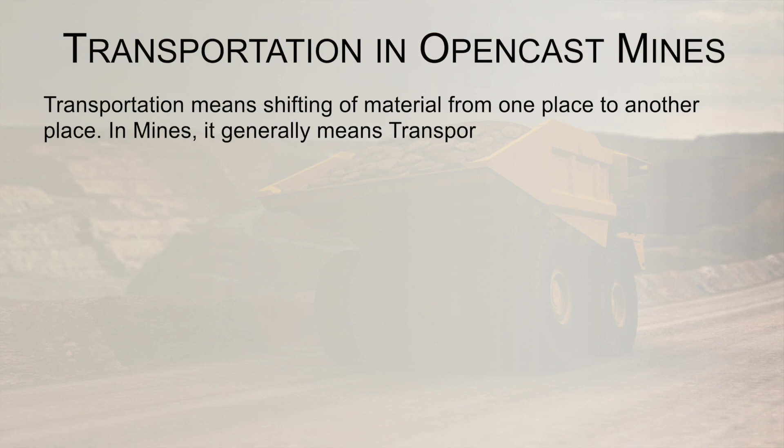Now I am taking up the matter of transportation in open cast mines. Transportation means shifting of material from one place to another. This is necessary because the mine is away from the crusher and the processing plant. The first destination from the mine is the run of mine crusher of the beneficiation plant, which needs various transportation means.

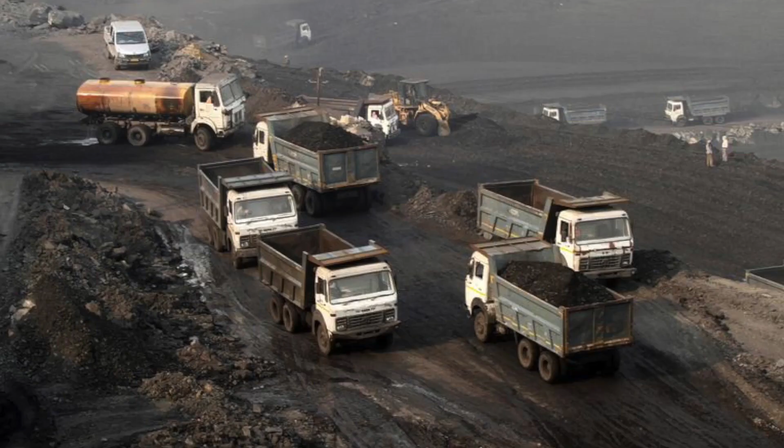In earlier days, track mounted haulages were quite common. Tubs were small, maybe 1 ton capacity, and the locomotives were also small, with weights around 8 tons to 35 tons, and the track gauge was hardly 600 mm, or 2 feet, in the past. So the mobility was not that high since it used to move on the track only.

Still, in some smaller mines where owners can't afford highly capital intensive transport means like big dumpers, 100 tonners, 20 tonners or 120 tonner dumpers with big shovels, people work with manual forces, and tubs are still loaded manually at the mining faces, then removed by direct haulages. If it is inclined, then endless rope haulages are used. If it is gently sloping, endless rope haulages are also used on plain grounds. The direct haulage system is quite common particularly where inclines are there.

Apart from dumpers and shovel or loader excavators, there are other combinations, that is conveyor combinations. Conveyors are quite common with bucket wheel excavators. The bucket wheel excavator is a continuous process for excavating material from a mining face, and onward it transfers the material to the next conveyor systems, and ultimately it goes to the processing plant, where crushing and the onward process goes on for refining the ore, material, or coal.

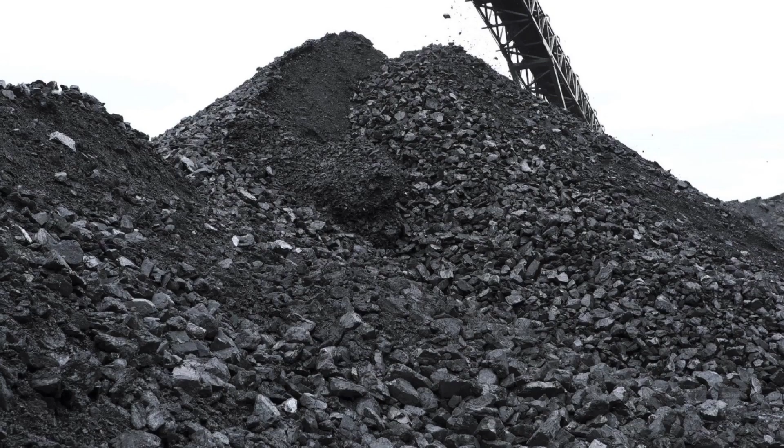The last one is aerial ropeway. Aerial ropeways are used particularly in loading plants, where the material comes from the mines to the bins and storage bins at the siding, where the bins are opened from the bottom and the material is finally loaded into railway wagons. So that way aerial ropeways are quite common. Still in the Dhanbad area you will see aerial ropeways bringing material from the river to the mines for stowing purposes in coal mining.

So there are two types of ropeways. One is the monocable ropeway. The cable is mounted on roller wheels, sprocket wheels, on the sides of the trestles at height, and the cable rolls over with the projection of the arm rod of the buckets which are hanging from the rope.

Here the ropeway cable, the steel wire rope, is holding the bucket frame, and at the same time it is also pulling the bucket frame. So a single cable is doing both jobs, and it rolls over the side roller wheels on top. That is called monocable.

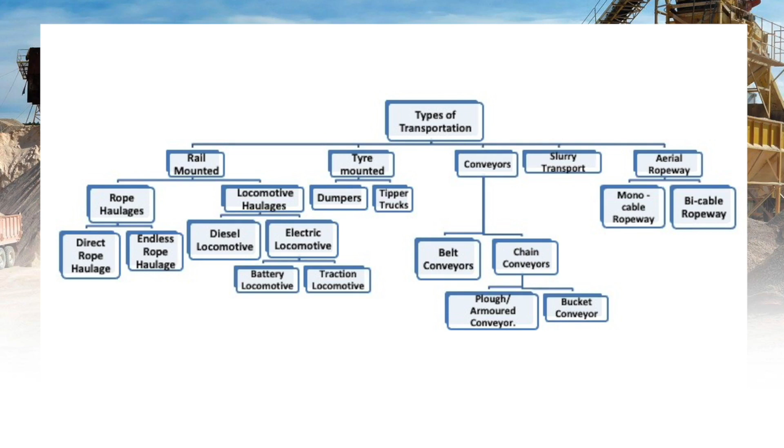Another type is carrier rope. The roller of the bucket frame on top rolls over the carrier rope, and there is another rope just below it, fixed to the frame of the bucket, which is the pulling rope. So the puller rope pulls while the carrier rope supports the bucket frame from the top, and the rollers attached to the top of the bucket frame roll over the carrier rope. This setup forms the bi-cable ropeway.

I have already talked about direct haulage. In case of movement of material by rope haulage, what is the prime mover? The prime mover is either an electric motor or a diesel engine. Then the power transmission - the end is the driven target, meaning the tub is the end which is pulled by the rope. How is the tub attached to the rope?

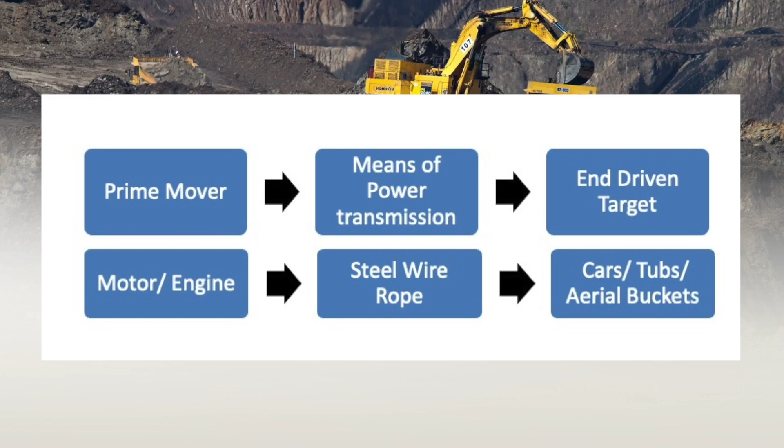Either by direct tying with the set of tubs, in case of direct rope haulage. In case of endless rope haulage, there are different clips on the rope because there is no end of the rope, so those clips attach the tubs to the moving rope. That way the rope is the via media for transfer of power from the prime mover to the tubs. So here is the general power transmission layout of the rope haulage.

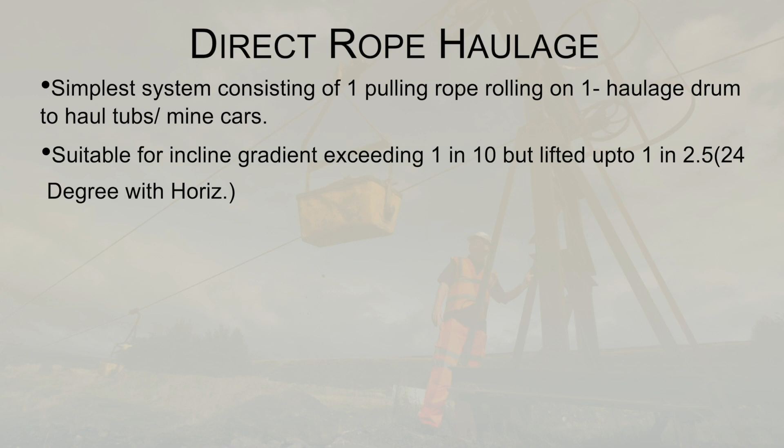Direct rope haulage is very simple. It works even on a gradient of 1 in 2.5, that is 24 degrees, down to 1 in 10, but it is most suitable for inclined gradients exceeding 1 in 10 - that means it is very suitable for steep gradients. For this, the haulage engine is a slip ring induction motor.

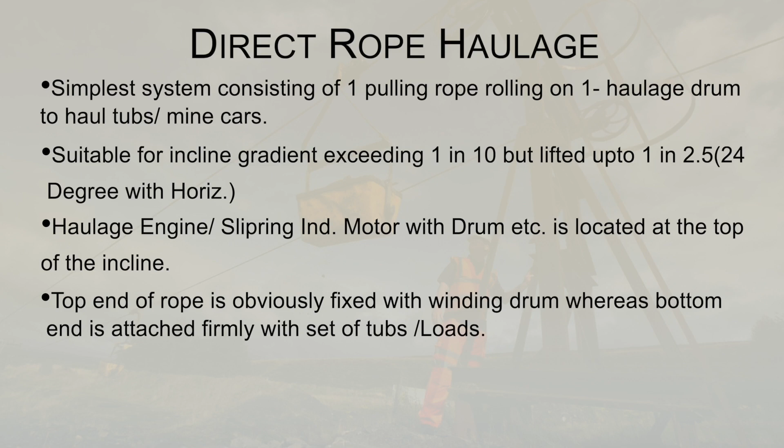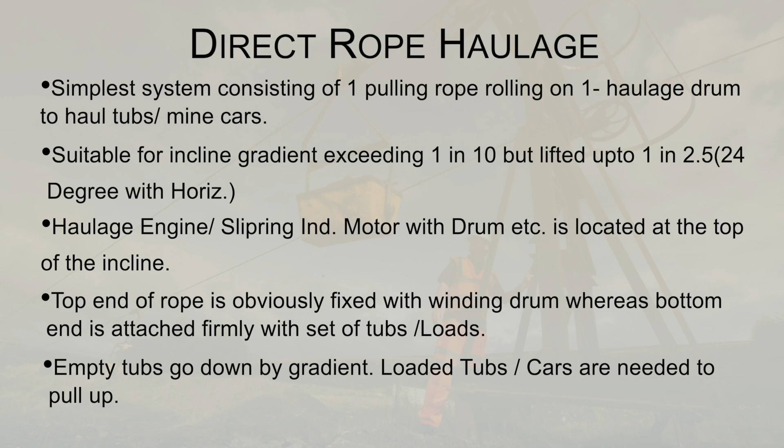The top end of the rope is fixed with the winding drum. That means the rope is attached at one end to the set of wagons at the lower position on the incline, and the upper end of the rope is tied to the drum of the direct rope haulage engine, the motor or engine installed at the top. Empty tubs go down, and the loaded tubs come up.

Rope speed is 8 to 10 kilometers per hour. For safety, on the last tub of the set there is what's called a monkey catch, or safety latch, or back stay - a back stay is given on the last end of the tub.

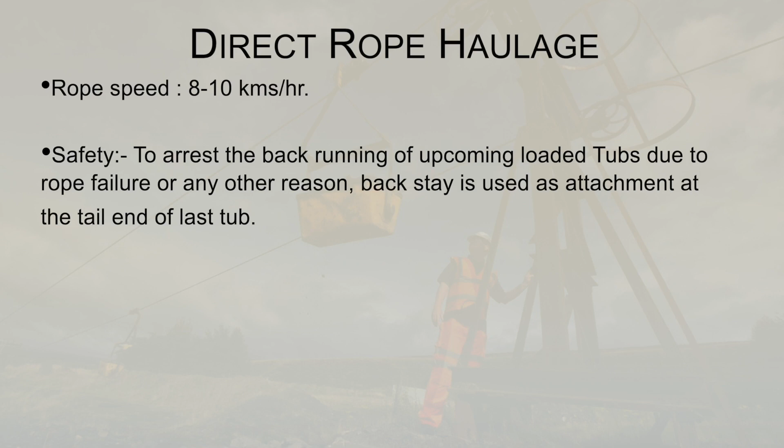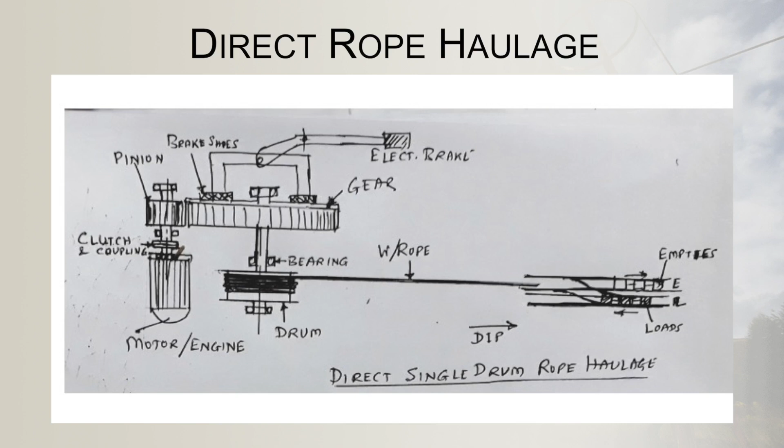On the left side the empties are going down, and on the right side, through the switches of the tracks - switches meaning a changeover like railway switches - the loaded tubs are coming up.

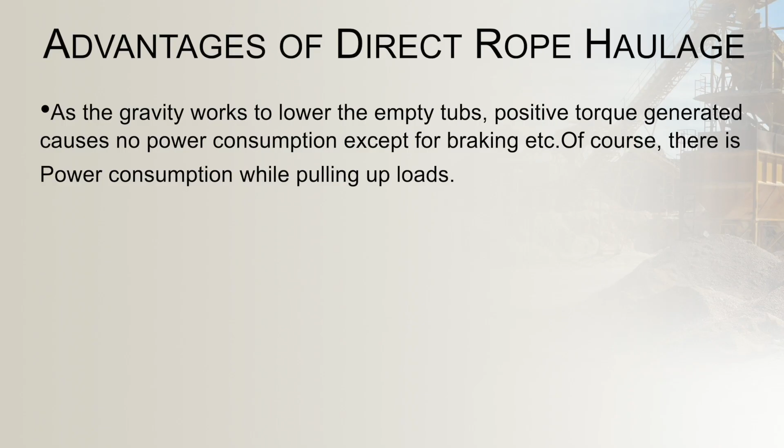As gravity works to lower the empty tubs, positive torque is generated - I have already told about this part - so pulling up the loaded set of tubs is not that power consuming. Definitely it needs overcoming torque, because the empty tubs going down generate positive torque, but that does not mean no power is needed at all - there will definitely be pulling power required to overcome the weight of the loaded set of tubs moving upward.

Now next comes the endless rope haulage. As the name implies, this rope haulage has an endless rope, meaning both ends of the rope are spliced and tied with each other. Splicing means it is jointed - opening the strands and weaving them again against each other to hold the rope properly, and then clamped. Clamped means couplings are used - a rope coupler, very smooth, filled inside with white metal, which holds the rope nicely and makes it endless.

So in endless rope haulage, both the load and the empty move together, one on each side simultaneously, because it is always moving in one direction.

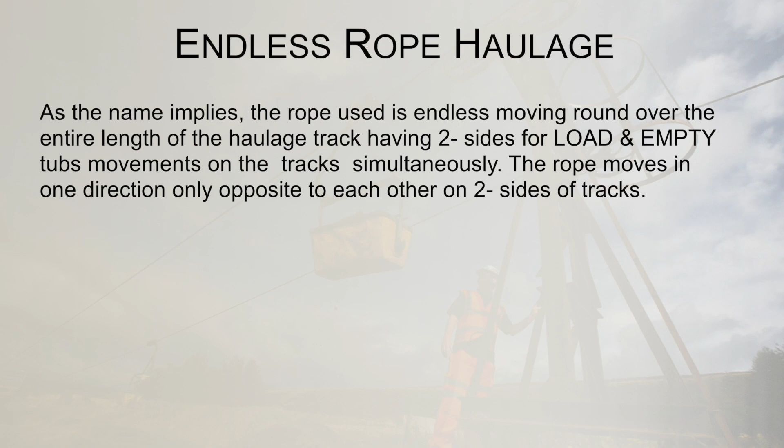The rope always moves in one direction; it does not reverse. So empty tubs from one side go to the mining face, while from the other side, loaded tubs come to the plant where processing takes place.

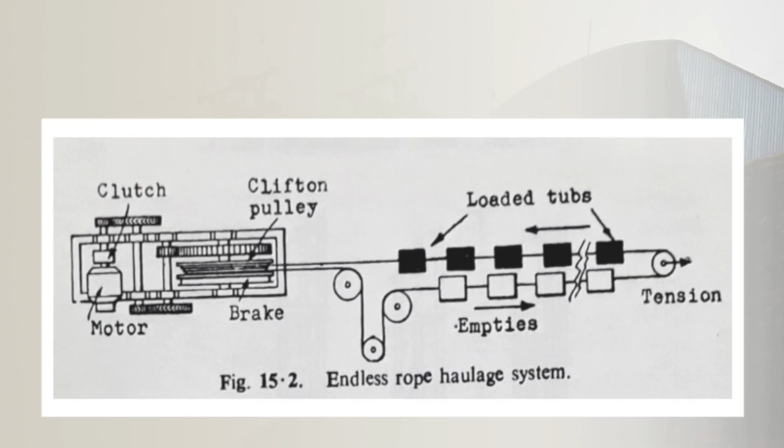Run of mine means the ore which comes out of the mine after blasting, transported to the processing plant or to the stockyard. This is the plan view of the rope haulage, a schematic view.

How does it work? The black set of tubs are the loaded tubs moving to the upper destination, shown on the upper side of the diagram. The empty tubs, shown in white, move together, and before the bend pulleys, the tubs are detached after reaching the mining place.

The bend pulleys are there. Their job is to negotiate the rope smoothly over the bend. Suppose any turning comes on the passage, meaning the mine roads or track have bends, then these type of diversion pulleys are used.

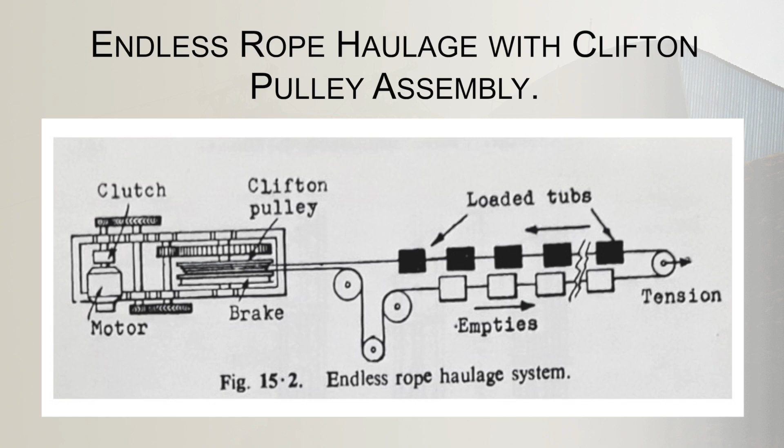On the right hand side, you can see the tension pulley. Tension is a must on the rope, otherwise it will not hold the drive drum properly and will be loose. So how can the drive drum pull or release the rope? It needs a very tight holding on the drum periphery so that due to friction, when the drum moves, the rope is either pulled on the left or right hand side, or released on the right hand side. I will show the diagram for giving tension after some next slides.

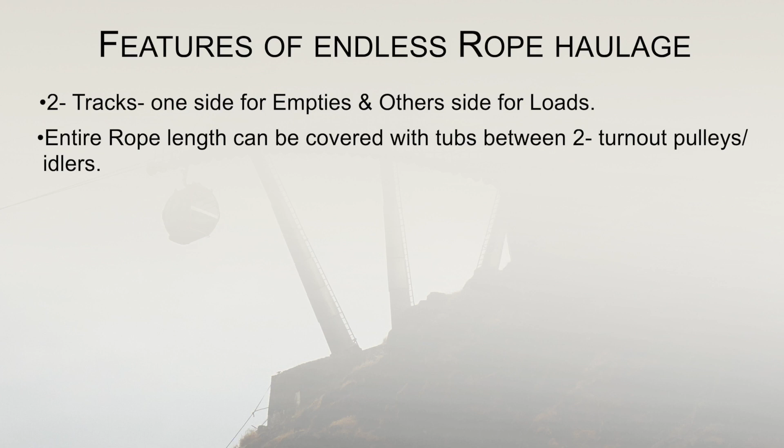Two tracks are provided on either side, as shown in the diagram. The entire rope length can be covered with tubs between two turnouts, pulleys, idlers, etc. This attachment is called turnout pulleys and idlers, or bend pulleys.

Attachment and detachment of tubs can be done with the help of clips and clamps. I will show the clamps. What are the clamps?

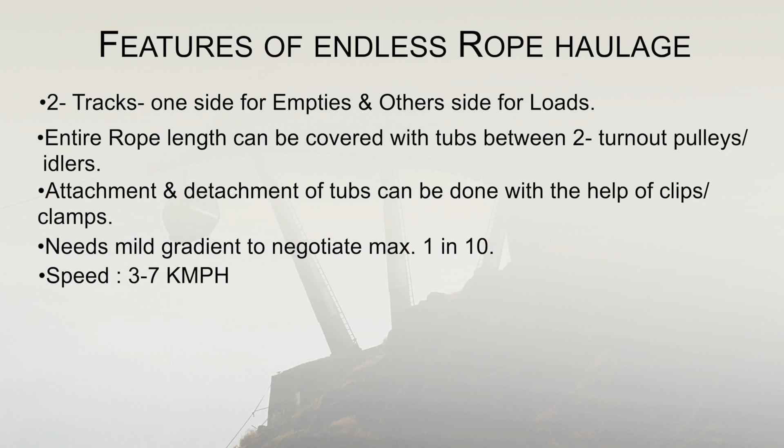It needs a mild gradient to negotiate, meaning 1 in 10 is suitable. Below that it works nicely, above that it does not work nicely, because above that the haulages are covered by direct rope haulage, as I told earlier.

Two types are used: over rope and under rope types. Forget about this one - over ropes are used in underground mining, not in opencast.

The return pulley is mounted on a gravity take-up frame. This return pulley, as shown in the previous diagram on the right hand side, has automatic tensioning arrangement. The motor is a squirrel cage induction motor, a tough motor designed to work in tougher conditions.

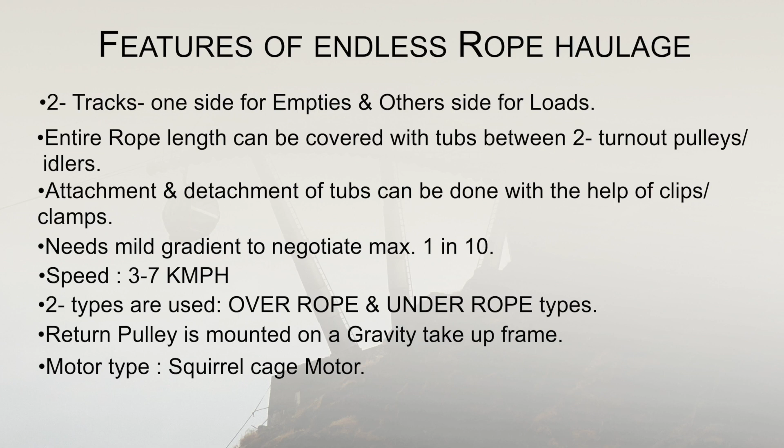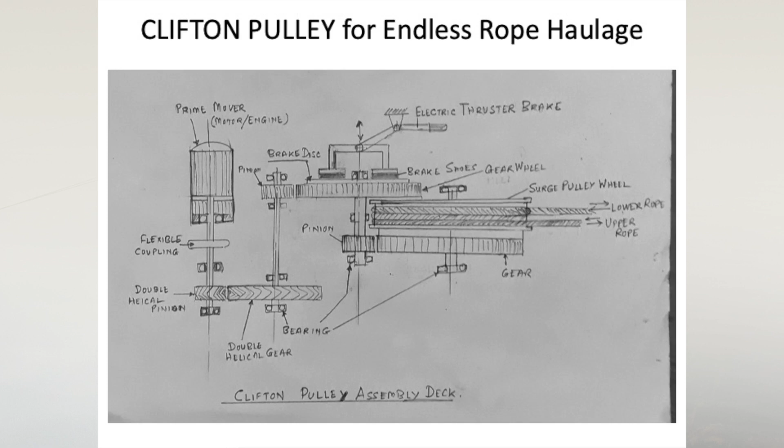So when the drum rotates, one side is pulled and another is released. Both ropes move in opposite directions.

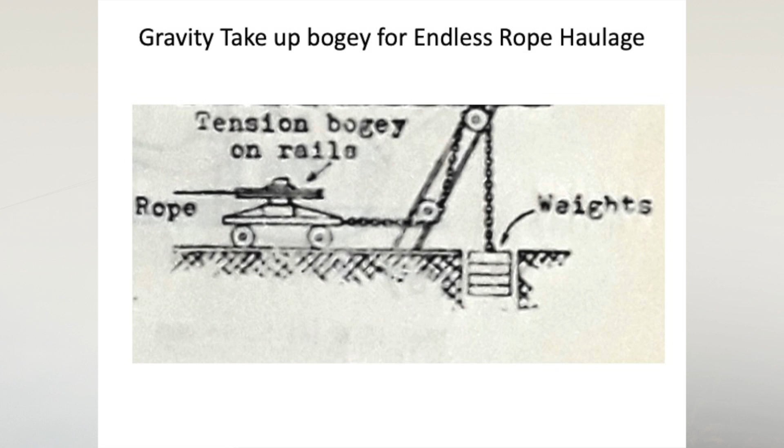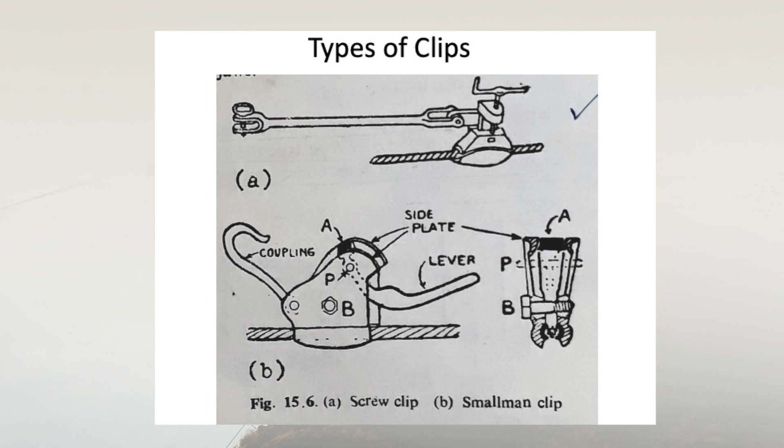On the other side, the J hook is already there on the left side. You can see it is attached to the clip, which is attached to the wagon, for clipping with the rope and unclipping from the rope.

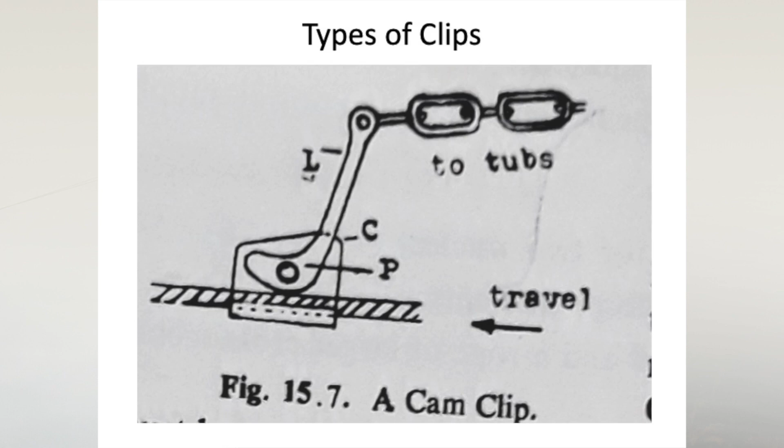This is another type of clip. The chain is there, attached to the set of tubs. At the bottom, there is a cam section of the handle, which is pushed down - then it holds the rope. When it is pulled up, it is detached from the rope.

Advantage of endless rope haulage: less wear and tear, because the inclination is less and the load on the rope is less. Lesser derailments take place because it is on horizontal ground and not as damaging, since the inclination is not more - it is less than 1 in 10.

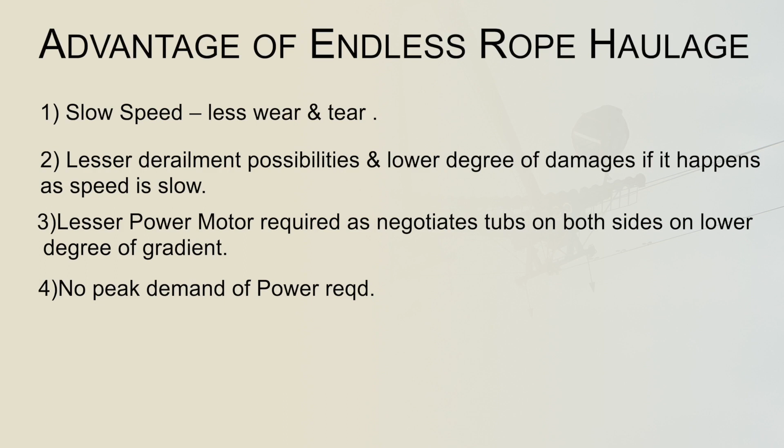No peak demand of power is required, because both sides are moving simultaneously with the loads. So the power requirement is not much, and it never demands the peak level of power requirement.

I must remind you again that 1 in 10 inclination means for 10 horizontal moves - not the inclined portion move, the horizontal move - 1 meter down is called 1 in 10. Similarly, 1 in 15 means 15 meters moved horizontally, not along the inclination. If you are moving along the inclination, the equivalent horizontal move is lesser than the inclined movement made by you. So the horizontal portion is 15 meters and the vertical portion is 1 meter - that is called 1 in 15.

Similarly, if it is a rising ground, that means if you move a horizontal equivalent of 10 or 15 meters, say 15 meters, and the level of the road rises by 1 meter, then it is called 1 in 15.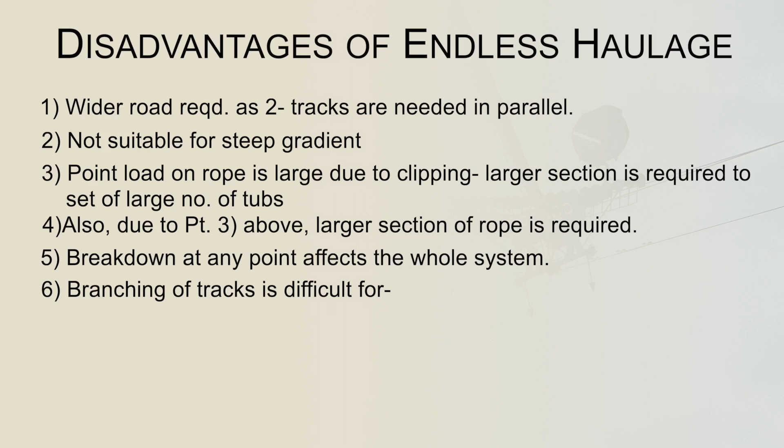Please remember that. Disadvantage of endless rope haulage is that it is not suitable for steep gradient. Two tracks are required, long tracks, and maintaining the endless rope is difficult, because sometimes the strand comes out and you have to change the whole rope, and at the same time you have to join the rope, which takes time, by splicing method.

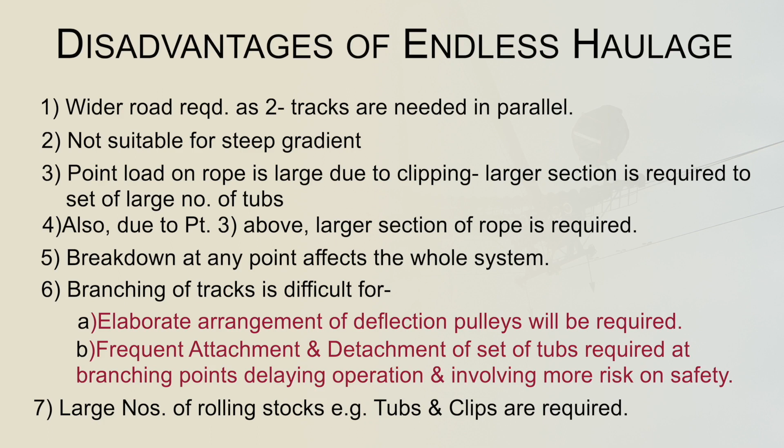Also, due to the above point, a larger section of rope is required because both side tubs are handling together, same rope is handling together. So larger section of rope is required, which is costlier, and handling is difficult while changing. Breakdown at any point affects the entire system. Naturally, up and down both are affected if the rope is snapped, because the same rope is working on both sides.

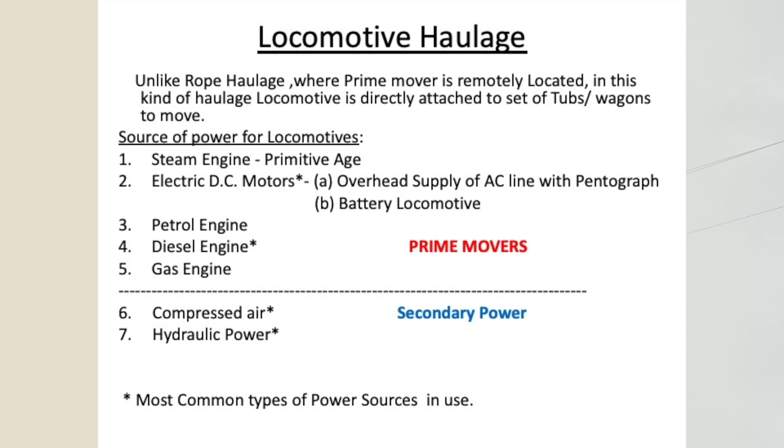It cannot move the locomotive on its own, unless it is generated and pressure is created in the receiver. Hydraulic power is similar. Unless the prime movers of diesel and petrol work in the background to generate hydraulic pressure, it will not operate.

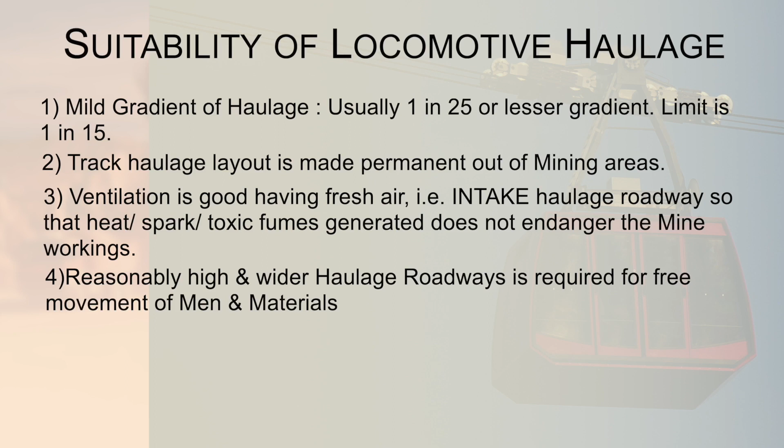Suitability of locomotive haulage: mild gradient, less than 1 in 15. Usually 1 in 25 is the lesser gradient. If you move 25 meters horizontal for 1 meter down, that gradient is definitely less, because tan theta equals 1 by 25, which is smaller than 1 in 15. So more the digit after 1 in, less the gradient; 15 is less, that means more gradient, more steep. Because 1 in 25 has more denominator, tan theta will be less. That's how gradients are measured.

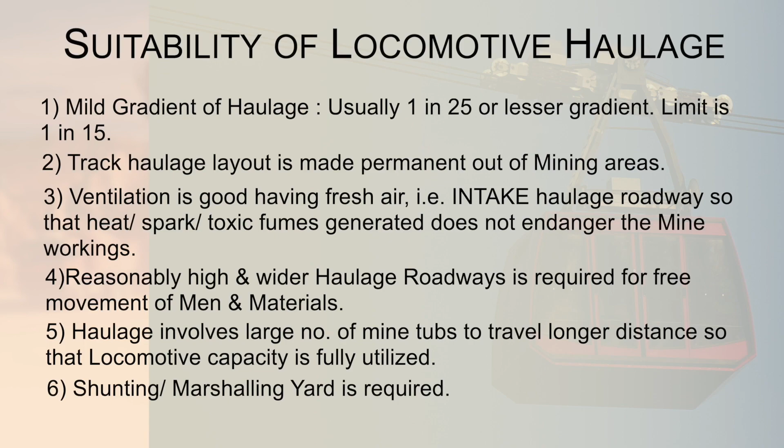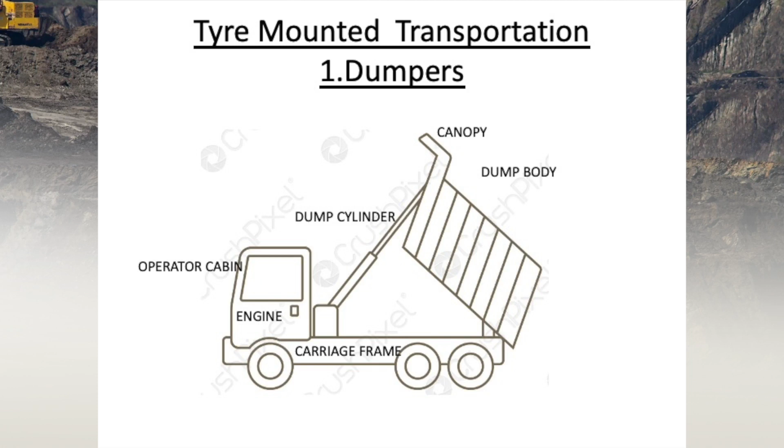Now coming to the tire-mounted system of dumpers. You can see the different parts of dumpers. In the front, the operator's cabin is there, with the engine just below that, hidden below the driver's seat, in front of the driver like other trucks. Then dump cylinders, you can see it is a telescopic hydraulic cylinder which is moved by the diesel engine of the truck, and the carriage frame is there on which the scoop body of the dump body is mounted, and on top the canopy is there.

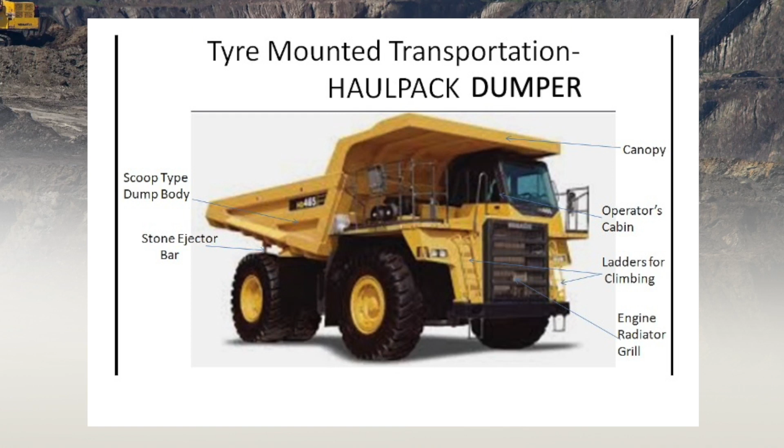That canopy, when the dump body gets lowered to normal position, gives protection to the cabin of the operator on top from falling boulders etc. from the bucket of loading equipment like loaders and shovels. So that canopy is a must on the cabin on top of the dumper.

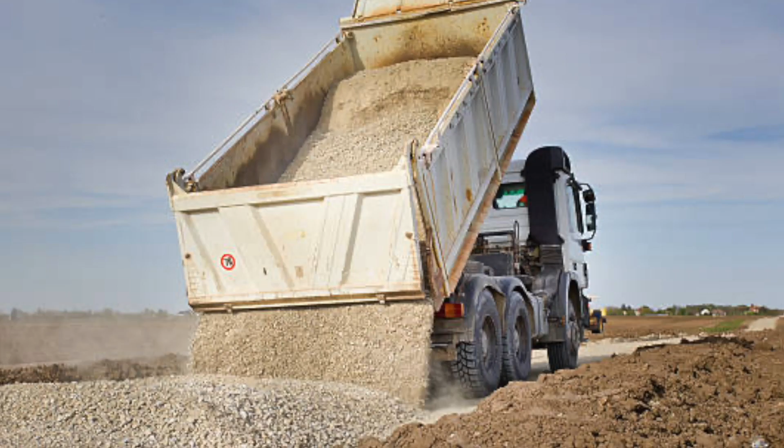If this is just a tipper truck, it is an ordinary truck with a jack to lift the body. Its body is not a scoop. This is the scoop body. Scoop means it is like a spoon. The bottom portion is going and thinning out when it is going to the back.

In the case of tippers, you can see the depth of the body is the same all along - this is a rectangular body, not a scoop body.

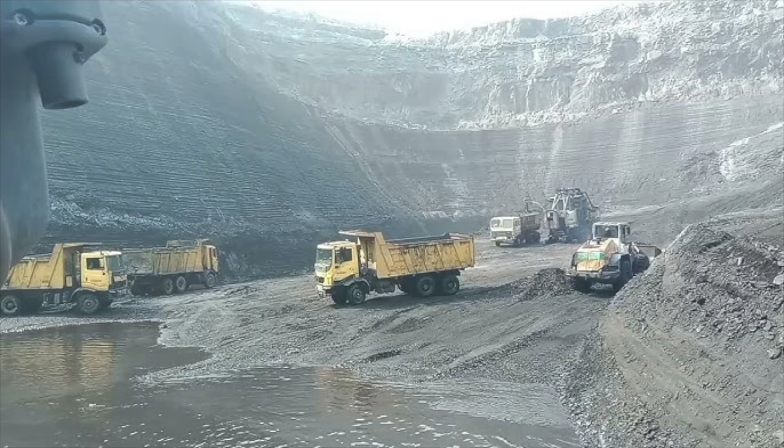In the transport system, when dumpers are moving, tire movement on the roads generates a lot of dust, and diesel engines are running in many pieces. Separate dumpers have separate engines, so the total diesel exhaust from all dumpers adds up, because in open cast mining the normal number of dumpers varies from 8 to 15 at a time, moving frequently on the roads, spreading diesel smoke and dust.

Whereas in the case of the conveyor system, pollution is not to that extent, and it occurs only at the drop points where materials are received by the other belt. That too can be covered properly for minimum or no dust generation.

It is most suitable for long and hilly terrains. It can negotiate well because it does not require a big wide road, reducing damage to the environment from cutting trees etc. It can also be maintained easily.

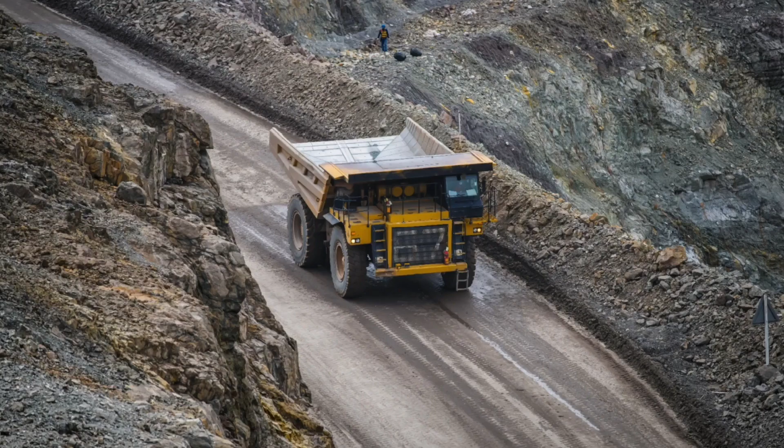Faults happen at particular points which can be maintained. It is a weatherproof system, but the only issue is that if the conveyor system goes down, it paralyzes the whole system, whereas with dumpers, if 1-2 are down, the rest of the 6 or 7 dumpers will still be running, so it doesn't paralyze the whole production.

A disadvantage of the conveyor is that if one belt goes down, it paralyzes the whole system. We need to have another parallel belt where it's urgent to maintain production, or we should have surge piles - buffer stock piles kept before the plant - so if a single conveyor from mines to plant goes down, production can be fed from the reserve stock kept at the start of the processing plant.

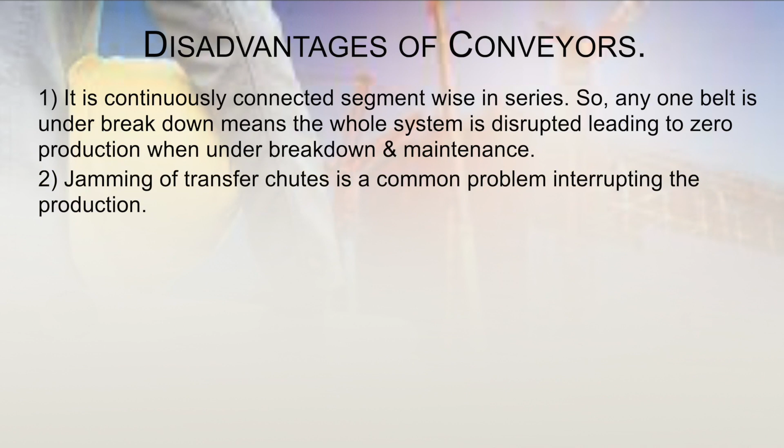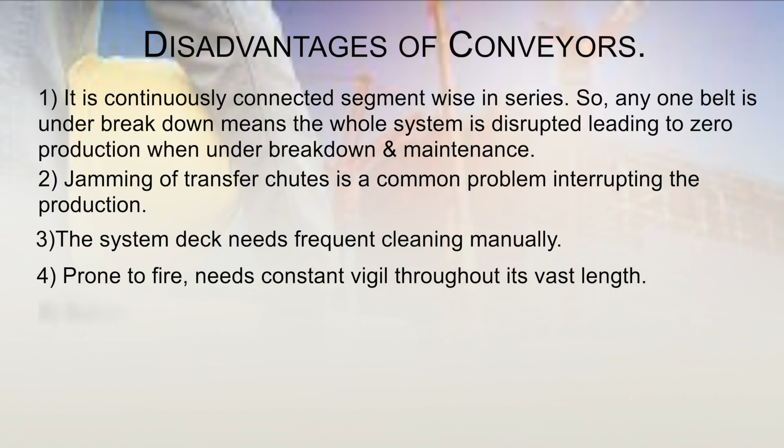Jamming of chutes and other issues take place very frequently, needing clearing from time to time. These are the problems. It is also very vulnerable to fire since it's a rubber belt system - it can catch fire and it's difficult to extinguish since it spreads very fast. Also, it cannot carry bigger material like dumpers carry, such as big boulders from the mining face.

For the conveyor, material has to be below 500mm in size, but its biggest advantage is that it is a continuous system giving very large output, particularly with the bucket wheel excavator system. It is a must and cannot be avoided - it's an integral part of the bucket wheel excavator system from the mining face, as seen in Neyveli Lignite Corporation.

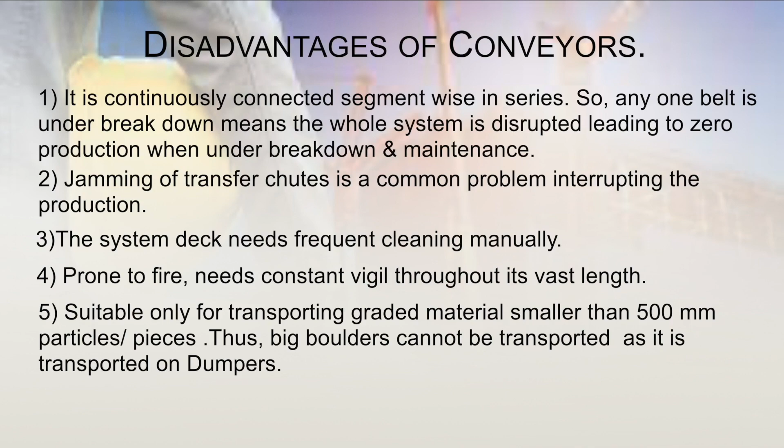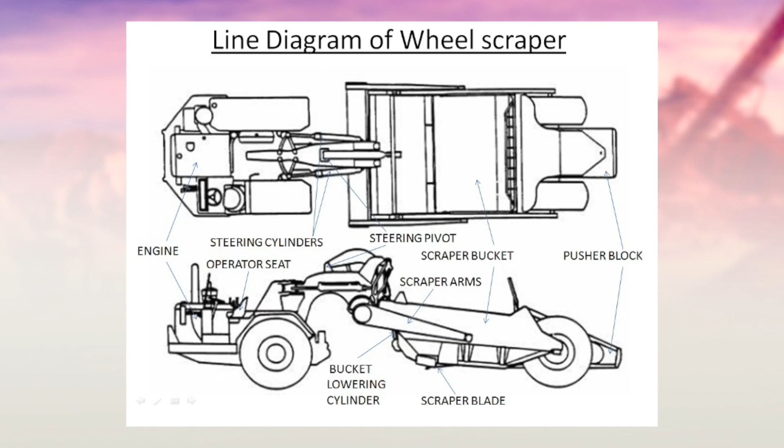There, the bucket is again opened at the bottom to spread out the material, and after emptying, it comes back. So it is one of the means of transporting, cutting and transporting material - it does not need any excavator or anything else. This is the advantage of this wheel scraper. Thanks to all of you.